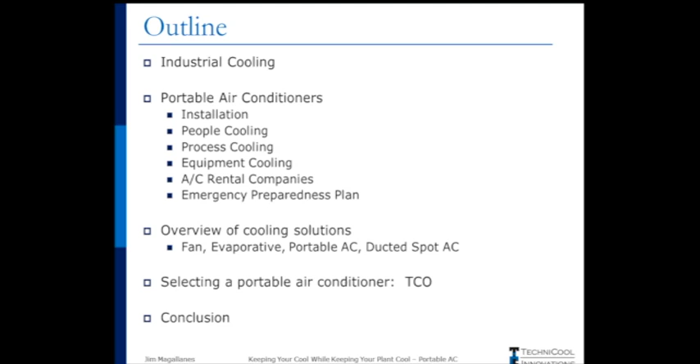And after that, if you decided to select a portable air conditioner that works for your warehouse or production floor, we'll talk about what to look for in selecting a portable air conditioner and lowering that total cost of ownership. And with that, we'll wrap it up and start taking questions.

So the industrial sector, it's very difficult to cool down a large warehouse, a large open working space. A lot of times you have people moving around in such a large area that cooling down the entire space isn't really practical. You also have large shipping doors that may be open throughout the day, letting in warm, hot, moist air, also dust and contaminants. And then having heat-producing equipment trapped inside those warehouses will also elevate those temperatures, and any type of processes in there raises the temperatures as well.

So a lot of times those indoor temperatures greatly exceed the outdoor temperatures outside the warehouse. So you factor all that in, plus the harsh conditions, whether it's dirt, debris, oil, or chemicals that come along with your industry. It's just a real challenge to keep that space cool.

So if you look at traditional AC cooling down the whole space, the capital costs associated with that, whether it's the initial capital cost of the equipment itself or the ongoing operating expense, is just astronomical. And it doesn't work out in every industry. Some industries, like pharmaceuticals, require the whole production floor be cooled or climate controlled. But we'll focus more on industries that can get away from that a little bit and make your workers more comfortable, as well as your products and processes more reliable, to deliver a quality product to your customers.

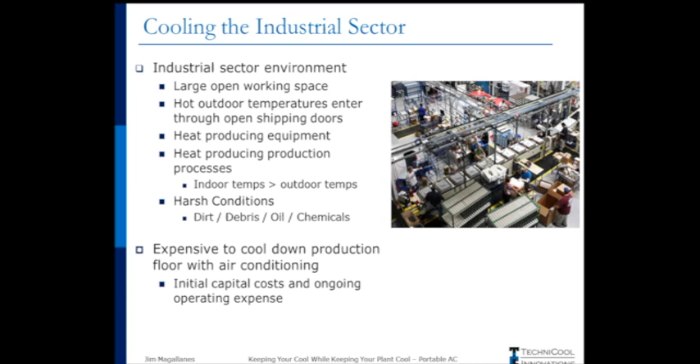So with that, we'll transition into spot cooling using portable air conditioners. Spot cooling is different from cooling down the whole warehouse space like a typical traditional air conditioner. You'll save on equipment costs and installation costs using spot coolers, as well as ongoing operating expense. Since you're only cooling down smaller areas within the larger warehouse, you're not wasting or consuming as much energy using that type of cooling.

These portable air conditioners will focus cold air on specific workstations, leaving the not-so-critical areas in the warehouse a little bit warmer. This also supplements, even if you do have some type of air conditioning or other cooling, and reduces your overall energy cost for the whole building itself. Portable air conditioners have two components of cooling.

It's sensible cooling and latent cooling. Sensible cooling lowers the temperature, so maybe you have it starting off at 85 degrees and you can lower it down to 70 or 75 degrees. That's sensible cooling. And it also has latent cooling, which actually removes moisture from the air, and this is kind of geared towards comfort cooling for people. The moisture that you can remove from the air will help make those people feel more comfortable.

So you may have a relative humidity in the air of 50%. And if you can lower it down to 40%, that'll help people regulate their body temperatures a little bit better and keep cooler.

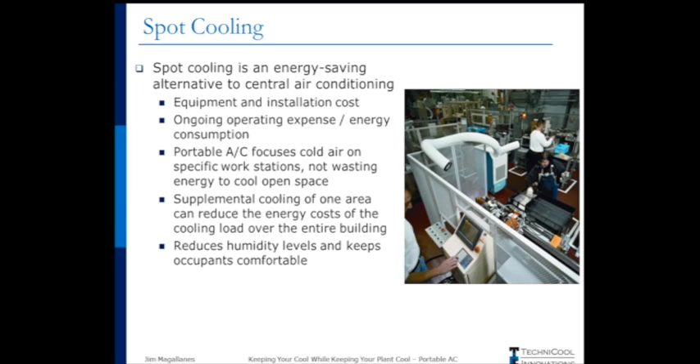So how does the portable air conditioner work, and how is it designed? Well, if you're familiar with your house AC, you'll know that the air conditioner is broken into two different sections. An indoor section that delivers the cold air inside the room, inside the house, and an outdoor section which transfers that heat to the outdoor section and exhausts that warm air out into the environment.

Well, in a portable air conditioner, all those components are packaged into one cabinet. You have the evaporator coil and the fan system delivery of that cold supply air. So in the illustration below, you'll see the warm air coming in to the unit and the cold air being delivered out the nozzles. The outdoor section, the condenser coil, compressor, and fan system for the exhaust air, that's located in the back of the portable air conditioner. You see the condenser air in on the side, and then it absorbs that heat and then exhausts that warm air out through the top.

Portable air conditioners are a lot more durable than permanent AC units. They have lots of air filters on their system, so they're filtering out dust and debris from the air and protecting the components inside the air conditioner. Also, they're designed for harsh conditions, so they're very reliable in these type of environments.

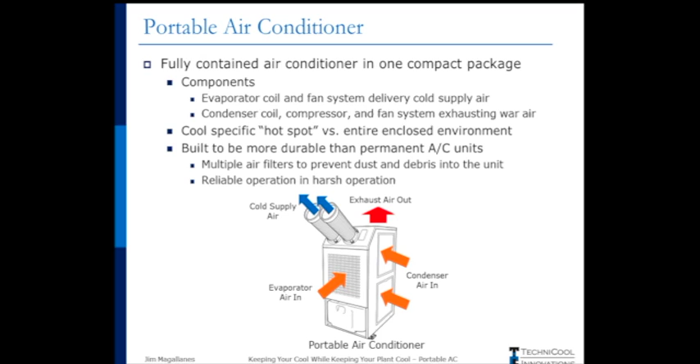So when you go into portable air conditioners, you have different categories. The biggest two is air-cooled or water-cooled. And this tells you how the air conditioner is removing that heat. In an air-cooled unit, it removes the heat via air, as you would think. And then in a water-cooled unit, it removes the heat via water. Those are two different mediums.

So water-cooled is actually a very efficient medium to remove heat. The only downside to that is you need a continuous supply of water to keep removing that heat from the air. So with that limiting factor, we find that more people use the air-cooled portable air conditioners because they're just a lot easier to use.

Within those type of air conditioners, different applications exist, whether it's an office environment, so for your production plant, it might be the QC department, a lab, or production office. So a smaller contained space within the larger warehouse space. And these type of units operate from 65 to 95 degrees Fahrenheit. And they have an office styling to them with a diffused louver. So that top picture shows you more of an office type environment unit.

The next one down is the industrial environment portable air conditioner, and this is for production floors. They have a higher operating range from 70 to 113 degrees Fahrenheit, and they also have these cold nozzles that you can direct the cold air to. So whether it's a process or a person or so forth, you have a concentrated cooling right on that area.

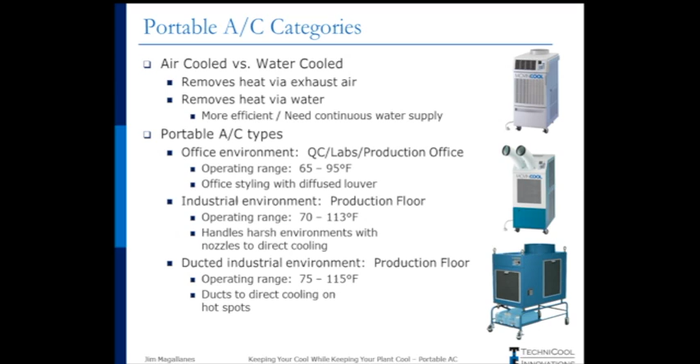These units are very easy to install, almost plug and play. They require about 10 to 15 minutes of installation time. The first thing you want to do is determine what type of air conditioning do you want. Is it going into a production office? Do you want the more office-styled unit with a diffused louver, or is it directly on the production floor, and have a more industrial unit?

The units range from about 10,000 BTUs to 60,000 BTUs. So roughly 1 to 5 tons. 1 ton of air conditioning is equal to 12,000 BTUs. And with that, each unit requires a different voltage to operate. So the smaller units, up to a ton and a half, about 18,000 BTUs, they operate on 115 volts, and that's the common everyday voltage that you find in your house. The larger units, from 2 tons to 5 ton units, those operate on 208, 230 volts. And the larger 5-ton units operate on 460-volt three-phase power.

So that may determine what units you want. If you only have 115 volts available, you may want several smaller units. Or if you have 208, 230 volts available, you may want one larger unit and have that ducted off into multiple locations. It just kind of depends on what your situation dictates.

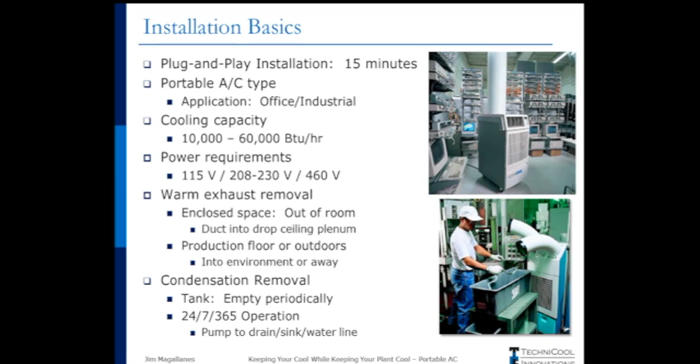Those are air-cooled portable air conditioners. The water-cooled are very similar — again, cooling capacity, the power required. The only difference is the heat transfer. Instead of transferring the heat to air, we're transferring the heat to an external water source. So you can connect this unit to cooling towers or a chiller system. This water supply needs to be plentiful and economical. If you're in a drought-stricken area, water-cooled might not be the best choice for you. A lot of times these water-cooled units are used when there's no good way to exhaust the heat out of the room, whether it's a warehouse, or a lot of times medical operating rooms use these type of units, or even basements, because you can't get the warm air out. Again, it has latent cooling, and you'll have to empty that tank or install a pump to get rid of that condensate.

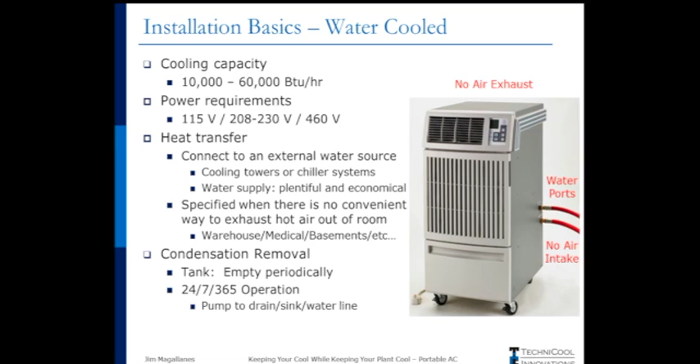With these units, there are lots of different accessories, and these accessories provide flexibility for the units. In terms of ducting, that's the biggest flexibility. The cold supply air can be ducted from these small units up to 60 feet. The warm air can be ducted up to 100 feet.

This determines where you want to put your portable air conditioner on the production floor or the warehouse space. You can have it right next to the space that needs to be cooled and duct the warm air 100 feet out of the way, or you can have the unit placed maybe 50 feet away and duct the cold air to the space. It just kind of depends on what works best for you.

The larger units that can cool the whole production floor can go up to 160 feet and have multiple drop-offs along the way. And these larger units can be hung off the floor, which saves valuable production floor space.

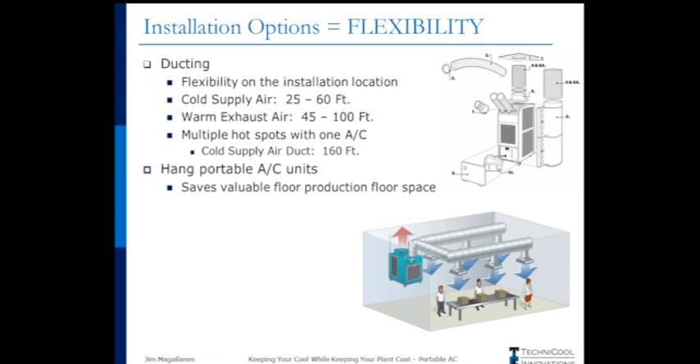As you can see in this picture, you have a large 5-ton air conditioner cooling down a whole production floor or a whole production line. The length of that large cold air supply maybe goes about 100, 120 feet, with multiple different drop-offs to cool down different workstations.

These drop-offs are flexible tubes that can move with the people as well. So maybe in the morning you have people working in one station and they move 10 feet, 20 feet away, and you can adjust those drop-offs to that new workstation. So it's very flexible, it moves with you. If the production floor or production line needs to be changed for a different product, you can adjust the ducting as well to adapt to a new production line. It gives you a lot of flexibility. You just need to correctly size the ducts, make them big enough to accommodate those long duct runs, and it's a great solution for a difficult cooling challenge.

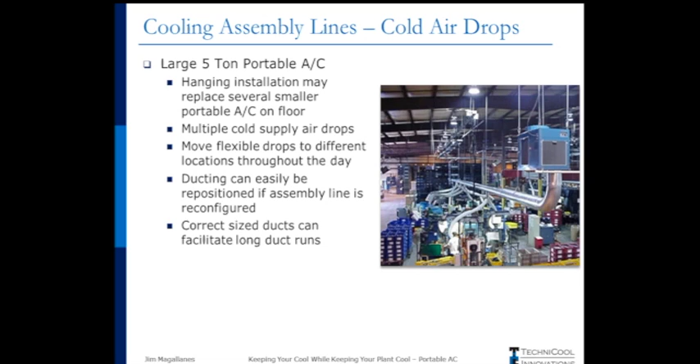So with that, we'll talk about people cooling.

Most manufacturing plants have these hot spots, and these hot spots can incur heat-related injuries or illnesses to your employees. They'll also drop the productivity rate of these people. As the heat increases, their work will slow down. They'll need more breaks to keep cool, more water to consume. This all reduces the productivity of these employees. So if you can keep them cool, you maintain that productivity rate.

As well as the temperatures get warmer, their ability to concentrate is less and less. So there comes a point where errors and accidents may increase because of the increased temperatures. And this will play into the hands of OSHA violations that may occur, whether it's heat-related injuries or illnesses or accidents as a result of the warmer temperatures inside the building.

So portable air conditioners can greatly help with these types of OSHA standards that are required to improve occupant comfort. It will reduce the risk of heat-related injuries or illnesses, and it also improves employee morale. It'll improve the quality and the productivity of these employees and the products you're delivering to your customers, as well as lower the employee turnover.

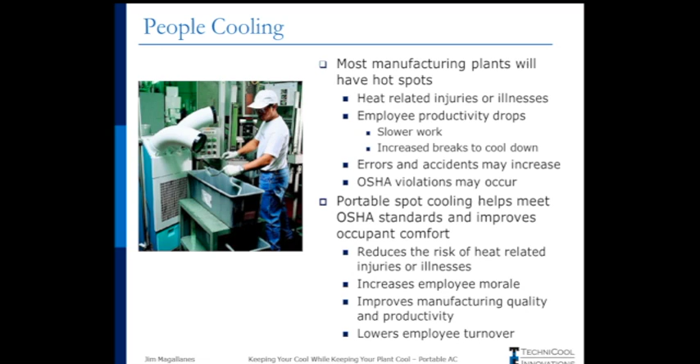So if somebody's happy, they're less likely to look for a better job. Also, it could help with summer absenteeism at your plant. If it's a really hot day and your employees know they'll be relatively comfortable, they're less likely to call in sick.

So in 1970, the U.S. government passed the Occupational Safety and Health Act, or OSHA, which states that employers are required to provide their employees a place of employment that is free from recognizable hazards that are causing or likely to cause death or serious harm to employees. Some of these heat-related hazards that could cause injury or illness are heat stroke, heat exhaustion, heat cramps, and heat rash.

On the right you'll see a chart, and the comfort zone is from about 68 to 80 degrees Fahrenheit, and this is where you have maximum efficiency of your employees. As the temperature increases, you'll start to notice some mental issues coming up with the discomfort of the higher temperatures - simple increased irritability, loss of concentration, loss of efficiency of mental tasks. So your skilled workers will become less reliable and have more accidents or errors.

And then as the temperatures increase, you'll get both the psychological and physiological effects of the heat. So again, loss of efficiency in skilled tasks and more incidents. As you move higher into the 90s, you'll start seeing more serious physiological problems - a disturbed water and electrolyte balance with the workers.

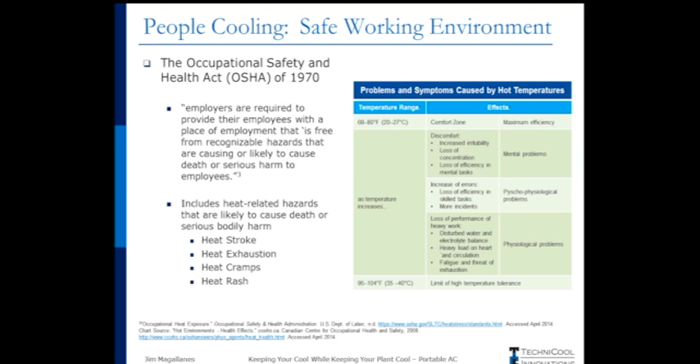You really need to limit their exposure to that heat and take more water breaks. OSHA always says water, rest, and shade - meaning more water intake, so having more breaks, and then limiting their exposure to that heat, so more and longer breaks.

That's great to know, but also what are the costs associated with these types of injuries or illnesses? Having one incident of heat-related injury or illness could be a disaster for a small company.

There are costs both to the employers and to the employees. The direct cost to the employees could be the pain and suffering of the injury and illness, the loss of income for not working that day, possible loss of employment if they can't perform the job any longer, and healthcare costs associated with that injury. The indirect cost to the employees would be the suffering for the employee's family.

The direct cost to the employer would be payment for work not performed that day, any type of medical and compensation payment, reduction or temporary halt in production for that day because they have to take care of the incident, increased training expenses and administration costs to better handle the heat, talking to them about taking more breaks and so forth. And the reduction in the quality of the work as the heat goes along definitely affects your bottom line, and the negative effect on morale of other workers.

Some indirect costs that may not be as readily visible are replacement of those injured and ill workers - that takes money to find replacement employees, the training that goes along with those new employees, and the reduced productivity during that training, the learning curve on the job. And then also all the paperwork, the investigation, and the documentation that comes along with the injury itself, and negative influence on labor relations.

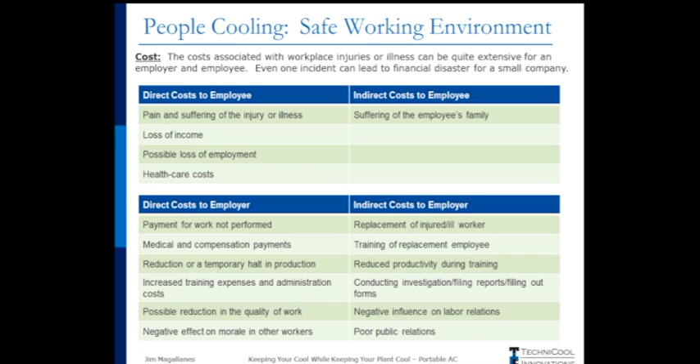The OSHA website has a link to a calculator that helps you determine what the cost would be for a heat-related injury. The OSHA Safety Pays program takes into account different factors and determines what additional sales you need to cover the costs of one incident. Heat exhaustion would be an example that I used recently this month to determine the cost. As you can see, the direct cost is $23,000, and that's covered either by workman's comp insurance, the employee, or some combination of the two.

The indirect cost would burden the employer directly, and that's almost $26,000, with a total cost of about $49,000. For just one heat exhaustion incident, that's a huge impact, especially for a small business.

Just a side note: Congress passed a law last year increasing these OSHA fines for each violation. The last time it was increased was back in 1990, so about 26 years ago, these OSHA fines haven't been increased at all. Starting August 1st of 2016, the fines are going up. The maximum penalty for one violation was $7,000; it is now going up to $12,471 for each violation, and that doesn't count per day or anything like that. The maximum penalty per violation, counting days that it's not being fixed, goes up to $124,709, up from $70,000 previously.

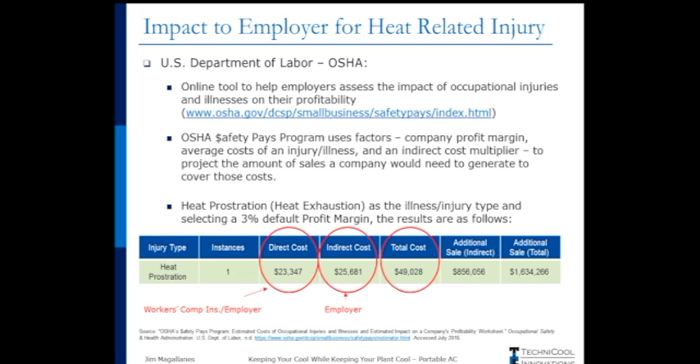With this new law, the penalties are adjusted annually for inflation, so it's not going to be another 26 years before the penalties rise. Each year it's going to rise due to inflation. So that's just another thing to think about as well.

With that, we'll start talking about spot cooling processes themselves. If you have a production process that introduces heat to your product, you can greatly reduce the cycle times using portable air conditioning, spot cooling. It'll also reduce the handling damage of the product and reduce the rejection rates as well. All three of those will increase the output of your productivity and also increase your profit.

Like I mentioned before, spot coolers reduce moisture from the air, so this could prevent defects as well, from warping or condensation, this latent cooling. And then as well, for heat-sensitive inventory storage, whether it's raw materials or finished goods, you can also keep those areas cool and keep your product well maintained.

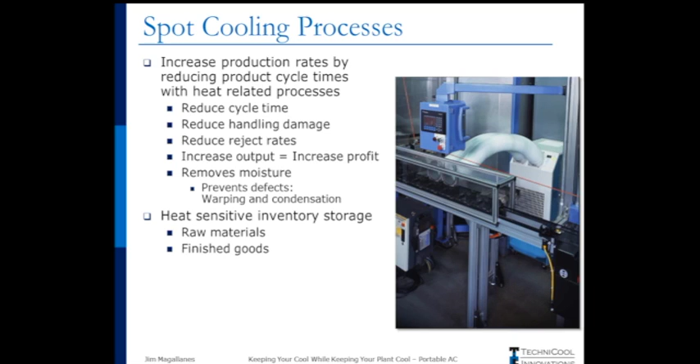Some of the industries that have these heat-related processes could be food, plastics—whether it's injection, thermoforming, or blow molding—and some type of soldering, brazing, or welding.

Studies have shown that we can reduce the cycle time, the processing time, up to 94%. So if you take an example of plastic molding, you have a part coming out of the mold that's extremely hot but needs a secondary operation done to it—maybe some flashing cut or a hole drilled somewhere. Your operator sets it aside to cool down, waits till it cools down, then picks up the part and does the secondary operation. Well, if you can take that part out of the mold hot and set it aside to be cooled down by a spot cooler, that will greatly reduce the time he needs to pick up that part again to do the secondary operation.

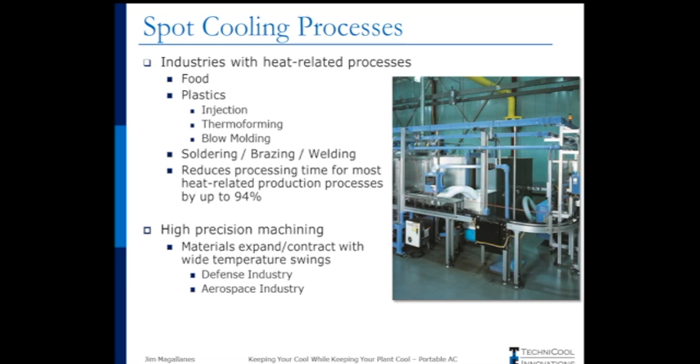Other areas to think about are high precision machining. A lot of times in the aerospace or defense industry, they're working with very, very tight tolerances on materials that can expand and contract with temperature swings. Whether it be a plastic part or a metal part, this could affect how it's cut and may not allow them to keep the tight tolerances that the customer requires. So using this portable air conditioner for those types of applications is a great way to maintain tolerances.

Spot cooling can also be done by cooling the equipment itself. More and more, specialized equipment is going out onto your production floor—equipment that deals with computers and heat-sensitive types of components.

To prevent failures or slowdowns, you can keep this equipment cool, reducing the number of times it needs to be serviced. As the temperature elevates for these heat-sensitive pieces of equipment, the frequency of servicing or component failure increases and will shut down your line. So by keeping this equipment cool, you can operate it more and longer, which will increase the equipment's return on investment, which is great.

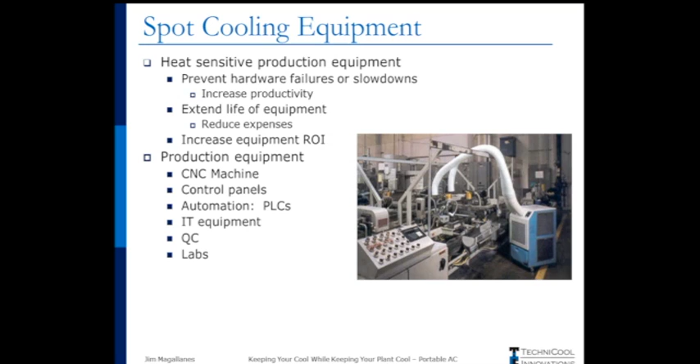Some types of production equipment that may be heat sensitive would be CNC machines, control panels, automation, PLCs, anything that has IT equipment, servers, computers, and so forth, as well as some high-tech QC equipment used to measure certain types of components, labs, and so forth.

You may have units on your production floor to help you cool down hot spots, but there are also AC rental companies out there that provide emergency and temporary commercial air conditioning units. They have portable air conditioners, trailers, tractor trailers with large ACs or chillers, and power generators to operate these air conditioners, all in their fleets. They rent them out daily, weekly, or monthly, however long you need them, and they come and install the units for you. They have a wide range of accessories to adapt to your building, and sometimes they can deliver same day if necessary. They're located throughout the U.S., typically in large metro areas.

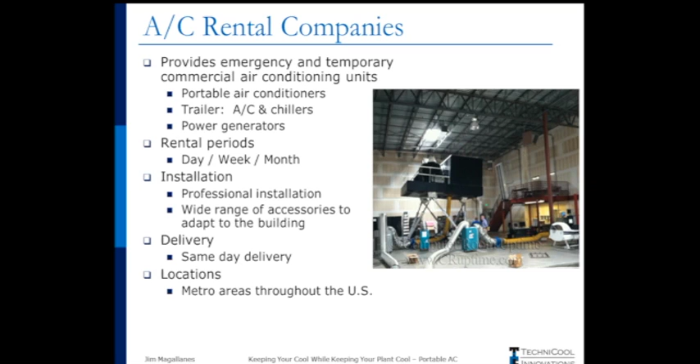This brings me back to our topic of emergency preparedness planning. It's always a good idea to prepare for an emergency one day. You want to plan ahead for the worst case scenario so you're prepared and not scrambling around when the emergency happens. So if something happens to your normal cooling, you want to think about portable air conditioners and generators to power those type of portable air conditioners.

As I mentioned before, 1 to 1.5 ton portable air conditioners operate at 115 volts. The 2 to 5 ton ACs operate at 208 to 230 volts. The larger 5 ton units operate at either 208 3-phase or 460 3-phase. So when you're specifying generators, you'll want to know what the load will be on these generators and how many air conditioners will be on there.

These air conditioners have a high inrush current associated with them, so you want to oversize the generators to be able to handle this quick inrush of current. It only lasts a couple milliseconds, but you'll need to oversize the generators to accommodate that.

Then walk through your plant, making sure the critical areas will be cooled in case of an emergency, and think outside the box as well. Think of special vulnerabilities that could affect your normal cooling. This isn't always a natural disaster that wipes out a whole region—it could be as simple as a normal thunderstorm with large hail damaging your rooftop air conditioner, or high winds knocking over a tree that damages your air conditioner. You'll need some type of backup cooling to keep your operations going.

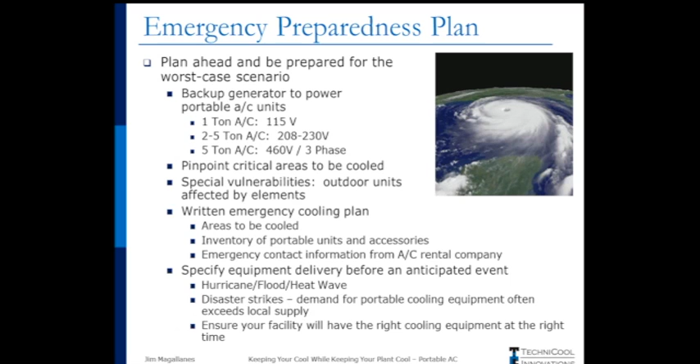With that, we'll talk about the general cooling solutions available to cool down large warehouses. We'll start with fan solutions first. Fans are a great solution for cooling down a large area. They're low-cost products, and the operation cost to run them is low. Ceiling fans can cool down a huge area—those ceiling fans can go up to 24 feet in diameter.

The cons, though, are that it just recirculates the hot air. So if you have high heat and humidity in that warehouse, you're not going to be able to lower the temperature at all. What you're doing is helping your employees have a constant airflow over them, which helps them regulate their core temperature, allowing them to sweat a little easier and experience the cooling effect. However, it doesn't filter the air, so you might have dust or dirt in the air, which could cause some eye injuries as well.

These fans can move a large volume of air. They operate at 115 volts or 240 volts, and the cost to operate is very low, about 3 cents an hour. So if we look at the total cost of ownership, the upfront capital cost is fairly low, except for the large 24-foot diameter ceiling fans, which are a bit higher, as well as the install cost for getting power up there. But the operation cost is low for all these units, and the maintenance cost is very low as well, so overall the total cost of ownership is low for these fans.

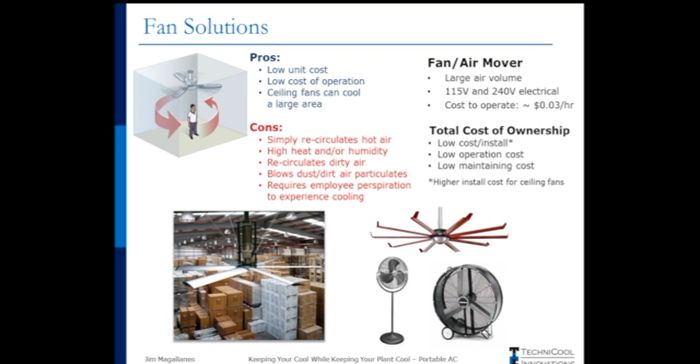Again, you're not dropping the temperature at all. You may be helping your employees feel a little better with the airflow over them, but the total cost of ownership is low.

Next, we'll talk about evaporative cooling solutions. If you're not familiar with evaporative cooling, you have a fan with a pad that is saturated with water. The fan brings air over that pad. That air absorbs the moisture and cools, dropping the temperature down. The air leaving these evaporative coolers is saturated with water, maybe about 80% humidity level, and those lower temperatures help your employees cool off that way.

The pros to these evaporative coolers: they're low in cost, and their cost of operation is low. The cons: these evaporative coolers are not effective in hot and humid regions, so a large portion of the eastern U.S. may not see them work well, because in the summer these regions have high temperatures and high humidity, so the ability to add more moisture to the air is very low. Also, these evaporative coolers may not be best situated for products or applications that are moisture averse. If you have some type of powder or product that absorbs moisture, adding more moisture to the air is not a good thing, so this might not be the best choice for you.

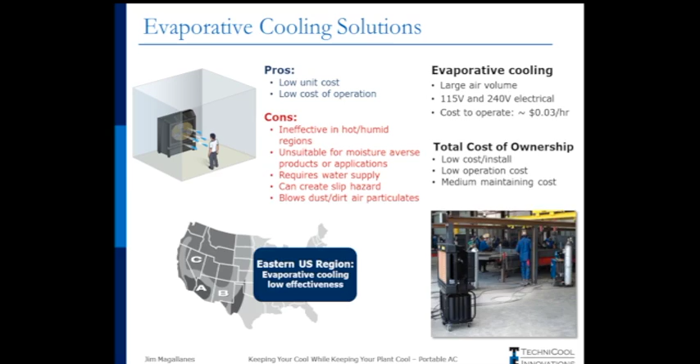If we revisit the portable spot cooling solutions we talked about earlier, the pros are that it delivers cool, dry air—removing moisture from the air, the latent cooling I mentioned, along with the sensible cooling that actually drops the temperature of the air. There's no water needed for these air conditioners, and it's an effective cooling solution for all regions in the U.S., whether you're using it out west where it's really dry like a desert, or in the southeast where it's hot and humid in the summertime.

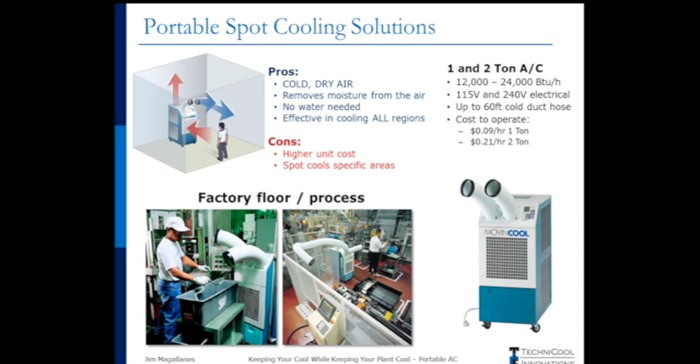The cons for these solutions are the higher unit cost, and you can only spot cool specific areas within your larger warehouse—the cost to cool down the whole area would be too great. These come in 1 to 2 tons of AC, about 12 to 24,000 BTUs. They operate on both 115 volts and 240 volts electrical, allow you to duct the cold air 60 feet away from the unit, and the cost of operation is 9 cents for the 1-ton unit and about 21 cents for the 2-ton unit. So a big jump in cost from the fans, but not terrible.

Next, if we look at the larger ducted spot cooling solutions, these are for large assembly lines. Again, the same pros as the portable air conditioners: cool, dry air, removing moisture from the air, no water needed, and it's effective in all regions. The same cons apply too: higher unit cost. And for this one, there's some installation cost associated with setting up these ducted assembly lines.

These are the larger 3 to 5-ton air conditioners. They range from 36 to 60,000 BTUs, and operate on higher voltage—220 volts 3-phase, or 460 volts 3-phase electrical. They allow the ducting to go up to 160 feet of cold air away from the unit, and the cost to operate these is about 29 cents to 40 cents an hour. So higher than the fans, but you're getting a lot more with it, and the operating costs aren't terrible either.

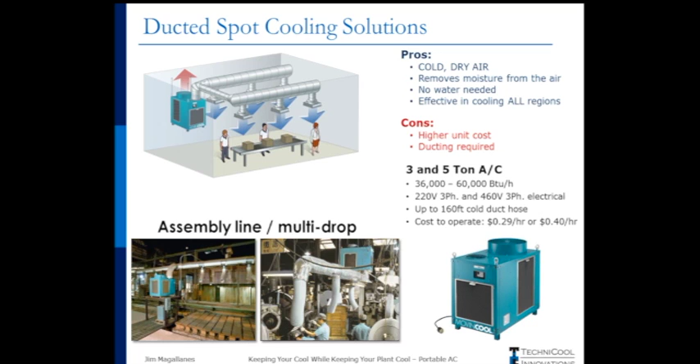So if you've decided you need some type of portable air conditioning in your warehouse, how do you select the right portable air conditioner for you?

There are 2 things you want to look at: the reliability and longevity of the unit, and having an established manufacturer who will stand behind the product after you purchase it. You want something reliable because it's cooling down critical equipment needed for your production processes. They're required for emergencies, so when you need it most, you want it working and you want it to last a long time. So is this portable air conditioner designed for rigorous standards? Does it come from a quality manufacturing process?

The upfront cost—how much it costs to purchase and install the unit—is easily calculated, but what is the maintenance or service cost of these units? A high quality unit will have a lot lower service cost than a lower quality unit. These are the hidden costs you need to think about.

A lot of these features come from an established manufacturer—an industry leader in this segment. What type of warranty do they offer? Is it both parts and labor on the unit for multiple years, or just parts only? From an established manufacturer, you can usually trust their published specifications.

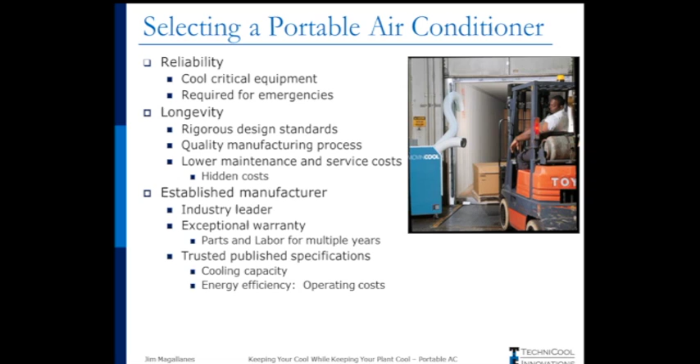Are you getting as much cooling capacity as you're paying for? Sometimes manufacturers will fudge a little bit or overemphasize the cooling, or the energy efficiency of the unit. How much is it really costing you to operate this portable air conditioner?

With that, we'll talk about the total cost of ownership. If you have a quality designed portable air conditioner, this will lower the overall total cost of ownership. This is what you really want to concentrate on, because if the unit's maybe 10-20% higher initially, what is its cost down the road, over the whole life of the product?

Air conditioners are mechanical equipment, and unfortunately all mechanical equipment will fail sometimes. So figuring out the mean time between failure is important in your purchasing decision. You want to look at internal components—how is it designed? Like a motor, that's a critical component within that air conditioner.

Do they use fully enclosed motors? An open motor will allow moisture, dust, and lint to get into the windings, which could cause shorts or corrosion with the motor and could cause a failure.

The casters—it's a portable unit, so you want it to get around, withstand bumps, going up and down curbs. What type of material is used for that caster? How is it mounted onto that unit? Is it just a stem caster, which is easily broken, or is it bolted on with weld nuts and bolts?

It all depends—the sheet metal inside the unit's design, is it reduced? Do they use a proper design for reducing stress? And the fasteners—are machine screws used so you can service the unit easily, or low-bearing sheet metal screws?

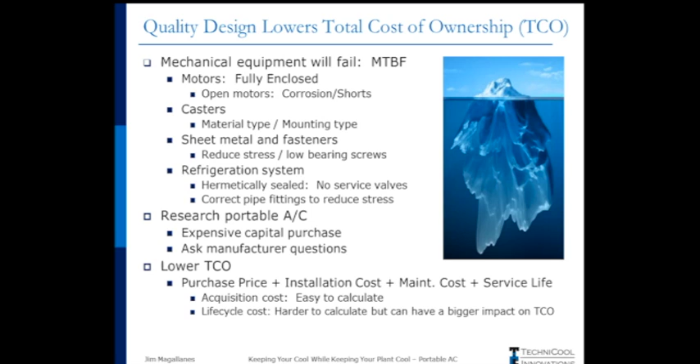So you want to lower your total cost of ownership. Again, the acquisition cost is simple to calculate—your purchase price plus installation cost. But the life cycle costs are a little harder to calculate. What is the maintenance cost, the service life of this unit? If a unit lasts 10 years compared to 5 years, you're going to greatly reduce your total cost of ownership.

Let's wrap it up and talk about the benefits of spot cooling: increasing your revenues by increasing worker productivity, your cycle times, your throughput. It lowers defects and scrap rates. It also reduces downtime by keeping equipment up throughout the production time.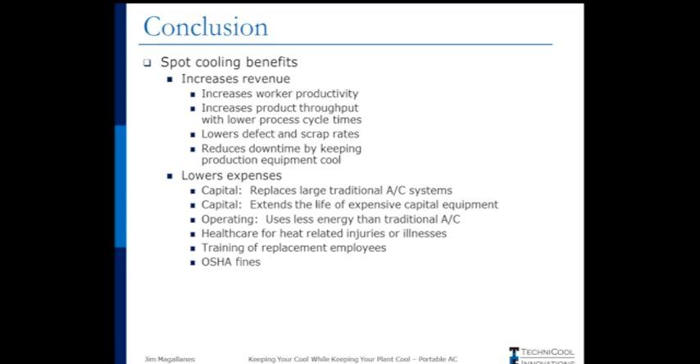It also lowers expenses. Instead of buying a large traditional AC with high capital costs, or extending the capital equipment of your production equipment by keeping that cool, it uses a lot less energy than traditional ACs. It reduces heat-related injuries and illnesses, or the training needed to replace those employees with those injuries or illnesses, and it eliminates OSHA fines.